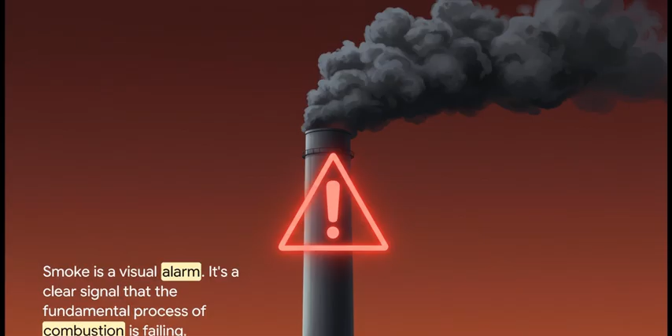Think of smoke as a big, flashing warning light. It's shouting that a really fundamental chemical process deep inside that incinerator is failing. It's a clear signal that something needs attention, and fast. Okay, so to really get why smoke is such a bad thing, we have to first understand what the incinerator's job is in the first place.

Its mission isn't just to burn random stuff. It's performing a very specific, very important chemical reaction that's all about protecting the air we breathe. Here's the core of it. The incinerator's whole purpose is to take a nasty mix of sulfur compounds, especially hydrogen sulfide, that's the toxic gas that has that horrible rotten egg smell, and to oxidize them. It's a chemical transformation, turning these harmful gases into something much less harmful, sulfur dioxide, or SO2, before they're ever released into the atmosphere.

So the bottom line is this. When everything is running perfectly, when that chemical conversion is happening just right, you shouldn't see a thing. A clean stack means a clean, efficient operation. The second you see smoke, you know the mission has failed. So how do we make sure that mission succeeds? Well, it might sound complicated, but it really just boils down to mastering two super simple fundamental rules of combustion.

And here they are. This is the mantra. Get it hot, give it air. Seriously, this little phrase is the key to the whole thing. So let's break it down, starting with that first part. First up is heat. Obviously, right? It's an incinerator. But it's not just about being hot. It's about being in a very specific temperature window for that chemistry to work its magic. We're talking about a target range of 650 to 850 degrees Celsius. In fact, a lot of operators are trying to dial it in right around 750 degrees.

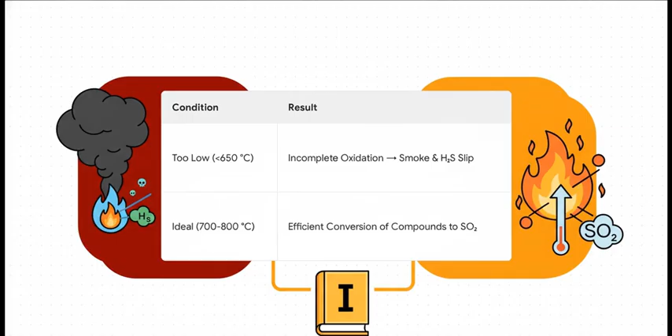And this isn't just a suggestion. Hitting this temperature is absolutely essential for the oxidation reaction to happen correctly. And you can see right here what happens when you miss that target. If you let the temperature drop below 650, the reaction just doesn't complete. That's when you get smoke, and even worse, you get that nasty hydrogen sulfide slipping right through the system. But if you stay in that sweet spot, you get an efficient, clean conversion. That's rule one.

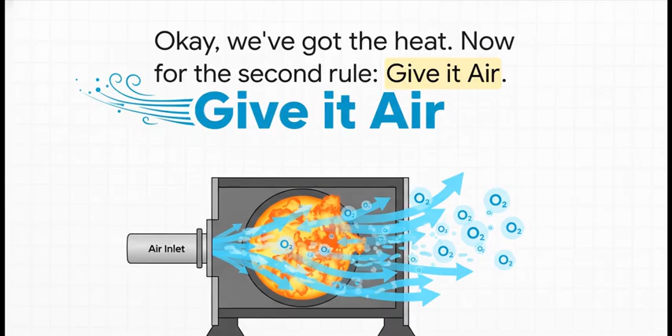Okay, we've got the heat handled. Time for the second half of our mantra. Give it air. And just like with the temperature, it's not about just any amount of air. The quantity is everything. See, the whole system is designed to run with excess air. It's kind of like an insurance policy. To make absolutely, positively sure that every single one of those nasty sulfur molecules finds an oxygen molecule to react with, you have to flood the chamber with way more air than you technically need for the reaction.

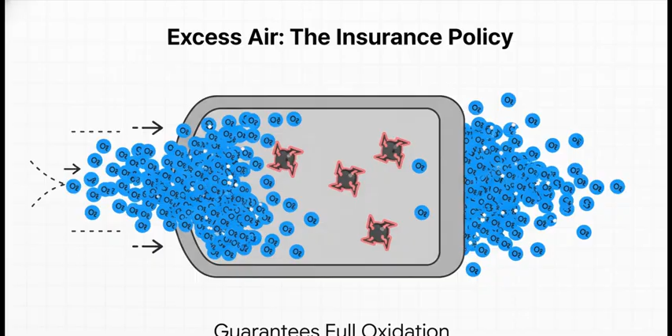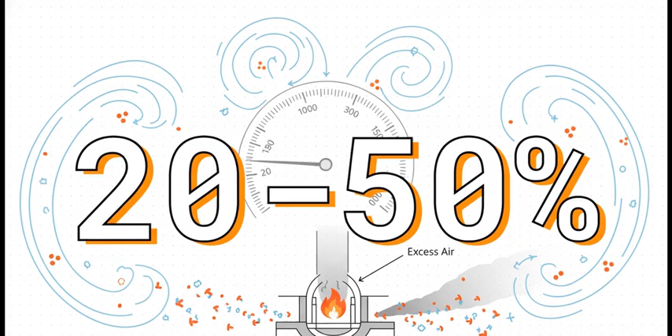How much more are we talking about? Well, the target is typically between 20 and 50% excess air. So, to put that another way, you're pumping in 120 to 150% of the exact scientifically calculated amount of air needed for a perfect reaction. This chart makes it really clear. That first bar, the stoichiometric amount, that's the bare minimum you'd need in a perfect lab setting. But in the real world, you aim for that second bar, that much higher operating range, to guarantee you get the job done right, every time.

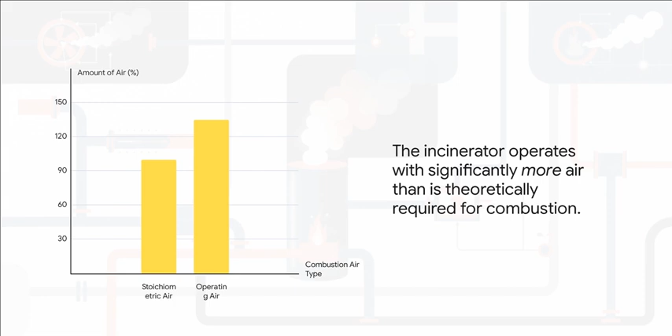So how do operators know for sure they've got enough excess air? They're not just guessing. They have a live, direct measurement they can watch: the percentage of oxygen that's left over in the gas coming out of the stack. And that target is usually right between 2 and 4% oxygen. If an operator sees that number on their screen, they know they have plenty of extra oxygen in the system. It's the final confirmation that they're following rule number 2 perfectly.

So, now we know the 2 rules for a clean stack. Get it hot, give it air. But what happens when things go wrong? Well, when an operator sees smoke, they don't panic. They have a game plan. Let's walk through it. But before we even look at the checklist, you have to know this one crucial fact. The vast majority of the time, the problem is a violation of rule number 2. The number 1 reason for smoke is almost always not enough air.

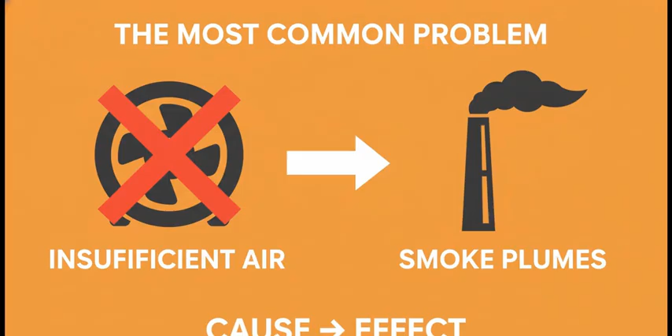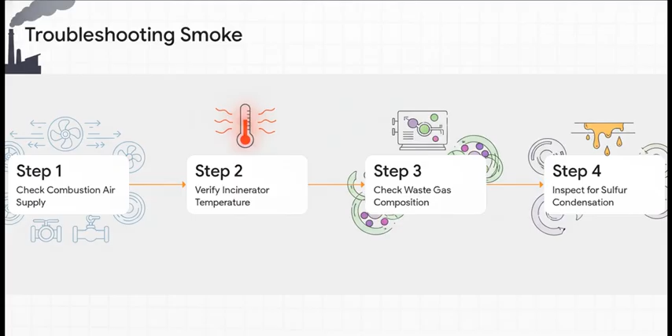So the troubleshooting plan starts right there. Step 1, every single time, is check the air supply. Is the blower on? Are the dampers open? Get the air right first. Only after they've confirmed the air supply is good do they move on to step 2, which is checking the temperature. Steps 3 and 4 are for looking into less common problems, but it all starts with the most likely culprit: air. All right, let's wrap this up with the key takeaways.

First, smoke is never normal. It's a big red flag for incomplete combustion. Second, the whole mission here is to turn harmful sulfur into less harmful SO2. And how do you do that? You master the two controls: temperature, between 650 and 850 C, and plenty of excess air. And finally, if you see smoke, what's the first thing you check? That's right, always check the air.

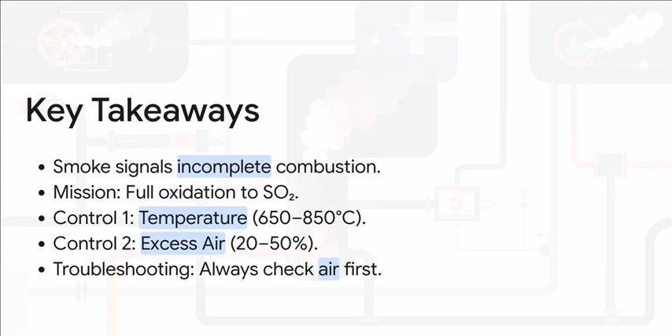And that kind of brings us to a bigger idea. We've been deep inside one very specific piece of industrial gear. But these rules, they're universal. This delicate dance between heat, air, and fuel is happening all around us, all the time. So think about it. How does this same balance apply to the engine in your car or the furnace in your home? And what happens when that balance gets thrown off? It's something to think about.